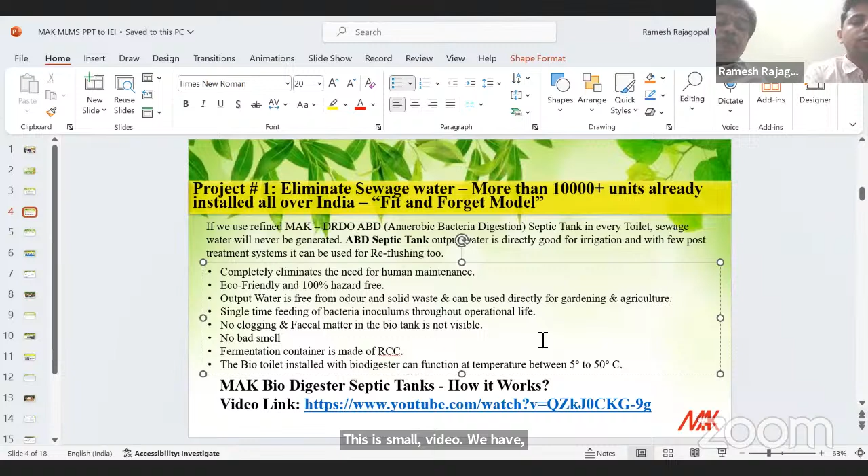There's a small video we are... No, there's not. Okay, we'll come back to the video a little later.

Our concept is that we should not use the underground drainage system for draining sewage, which goes without treatment into water bodies, thereby polluting them.

What we do is arrest the pollution at the source itself using our ABD technology, as well as the technology we obtained from CSIR, the advanced oxidation process. This is a form of tertiary treatment where the effluent from the ABD tank is further treated, and the resulting water is pure, equivalent to drinking water usage.

So we mainly advocate treating the contaminated water at the source, and we say this underground drainage can be avoided, mainly because when water is converted to sewage water and carried through the UGD, it carries a lot of contamination throughout its journey, ending up at one bigger STP. This is like adding up the load before trying to treat it.

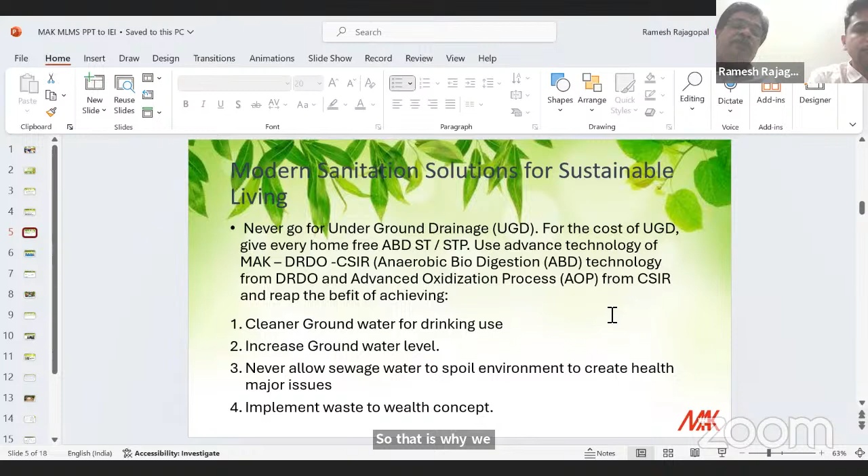Our ABD septic tanks come in 4 standard models: 10 user, 20 user, 40 user, and 100 user, with capacities of 800, 1,600, 2,900, and 8,000 liters. If we want to go beyond the standard models, we can also do on-site civil construction to customize according to the client's needs.

This is the basic flow chart, where the wastewater, the black water meaning fecal matter and matter generated from urinals through flushing, goes through a pre-filter where any solid waste like sanitary napkins or plastic gets filtered out.

Then it flows into our ABD MAK STP septic tank, split into 3 compartments. The majority of fecal matter is digested by anaerobic bacteria in the first compartment, then flows into a second compartment where further digestion happens, producing a small amount of methane gas evacuated through a vent outside, and then the pure treated water comes into the third compartment.

The overall retention time of this ABD tank is around 2.5 days. The final water can be used for irrigation or ground recharge, pumped through a bore into the groundwater to improve groundwater levels, or it can be directly discharged into any water bodies.

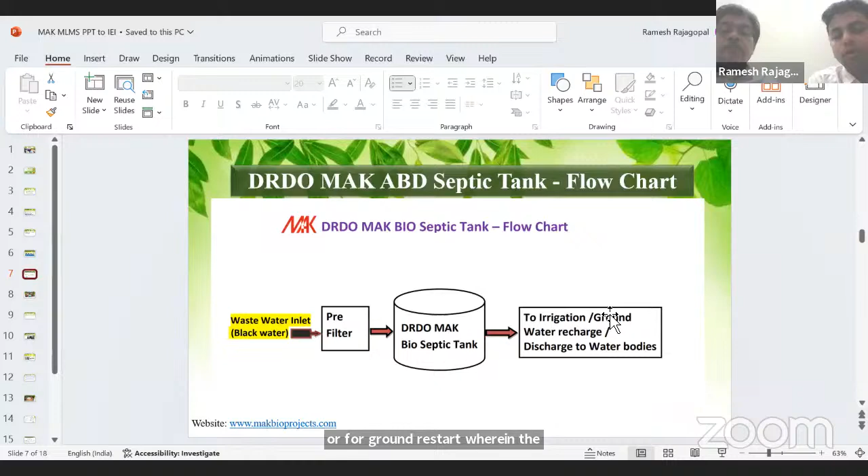This is a comparison which Ramesh sir already explained between our ABD septic tanks and conventional septic tanks. As he said, this is a maintenance-free tank, and the bacteria inoculum has to be fed only one time — it's a fit and forget model.

The other one needs periodic evacuation of sewage weekly or twice a week, and there is no foul smell generated with ours, whereas in the conventional tank a lot of smell is generated. The main thing is pathogen reduction.

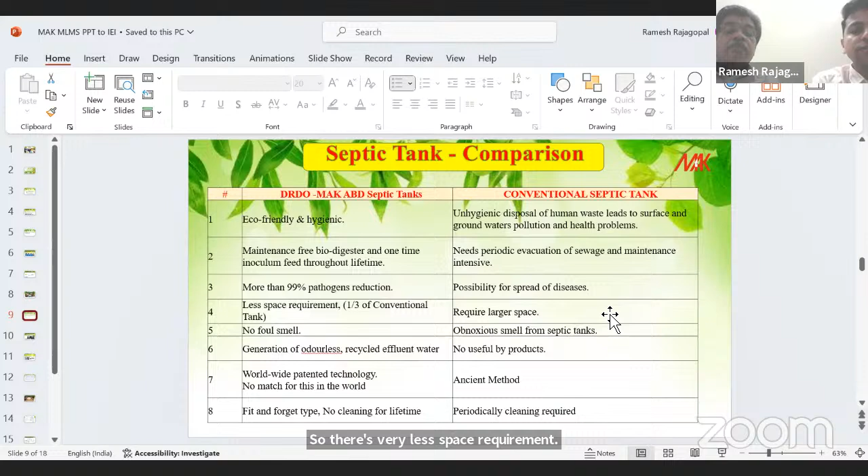It kills almost 99% of pathogens, while the other one, since it is not treated, can spread a lot of diseases from E. coli or viruses. Our septic tank is very compact and modular, requiring very little space. This is a patented technology, whereas the other one is just a normal technology.

This is a project where we try to treat a lake using our MAK inoculum, which is home-generated anaerobic bacteria. As you can see, in the before and after model, the lake has been completely cleared of all pollutants and pollution.

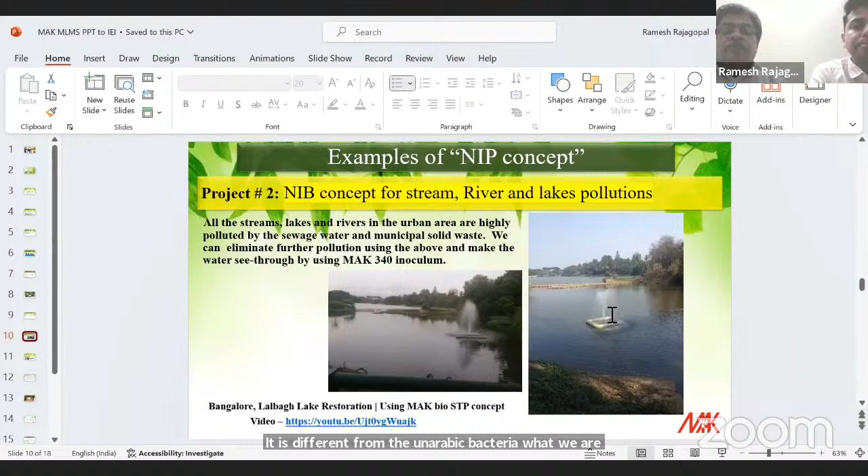This is another different consortium of bacteria. This inoculum is made for aerobic treatment, where for larger river restorations and lake restorations we use this MAK 340 inoculum. It is different from the anaerobic bacteria we got from DRDO. This MAK 340 is found and manufactured by us, on our own.

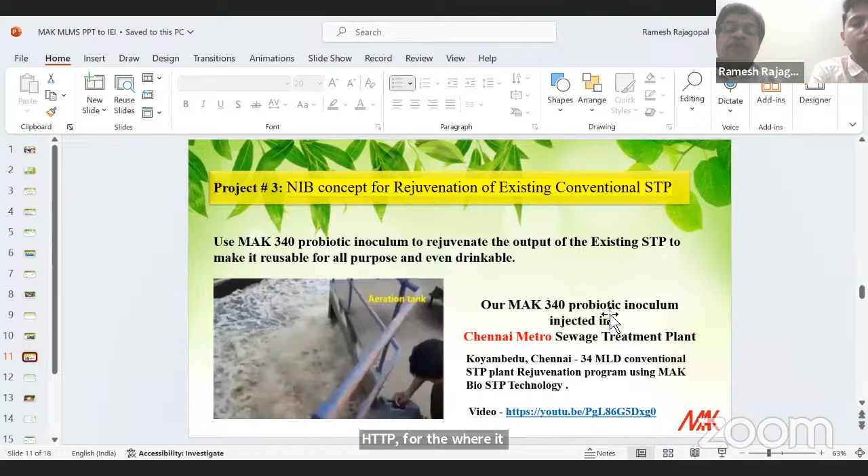The same MAK 340 inoculum is being used in the tertiary treatment of Koyambedu STP, which was a 34 MLD conventional aerobic treatment plant. You can see the result: from BOD level of 202 and COD level of 504 at day 10-11, it has come down to 2.2 and 4 within a span of 11 days.

Initially we were feeding 10% of the volume, and slowly we reduced the volume, until at last the volume is very less. But we need to keep adding the aerobic inoculum on a daily basis. That is more expensive, but still it is effective.

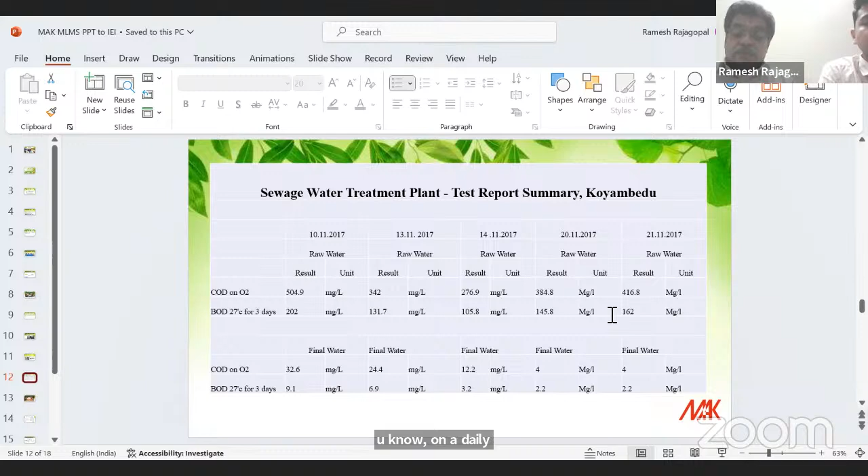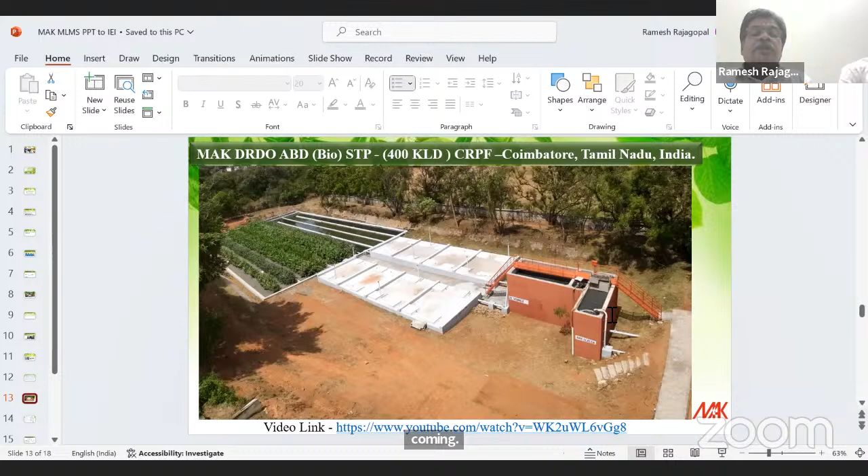Then the output is fed into the reed bed system. After the reed bed system, there's a collection tank where the final treated water comes. From there, the water is reused for gardening the entire campus area.

The TSS is very low, so they could even use drip irrigation. This is the flow chart of the STP, where we have given an instance where both black and grey water are treated separately, or even if combined, we can still treat it.

This is an example where the black water is sent through a pre-filter, then an anaerobic bacteria digestion tank, and then to the reed bed system. After the ABD tank itself, the water is good enough for irrigation.

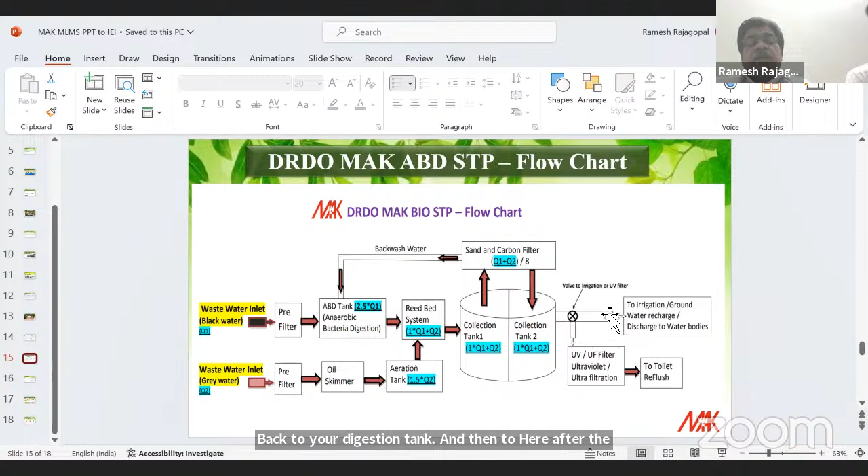But for reusing, reflushing, and other secondary usages, we need some enhancement of the water. So we go for a sand and carbon filter, or UV filter for disinfection, or UF filter for disinfection. Then it can be used for reflushing or secondary usage like construction.

The grey water is again passed through a pre-filter and an oil skimmer, then it goes to an aeration tank, then to the reed bed, and then to the same sand and carbon filter. Depending upon the reuse, it can pass through other tertiary treatments for any enhancement needed.

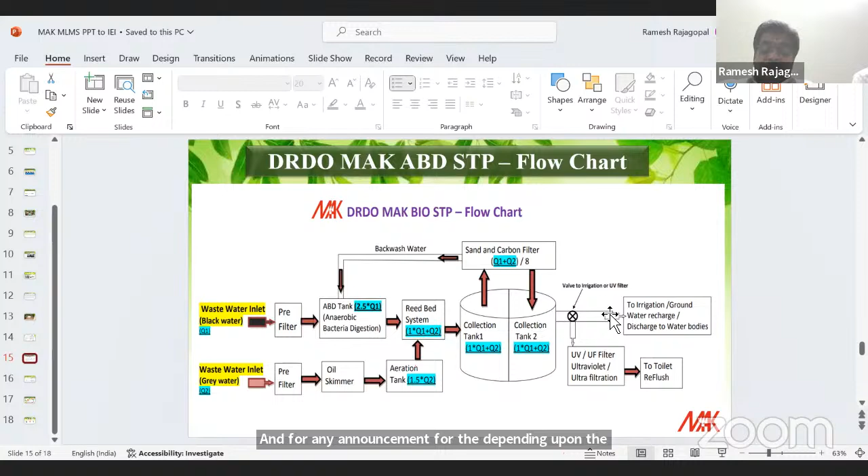The main difference between the anaerobic STP and the conventional STP is that this is eco-friendly and hygienic. It's a maintenance-free biodigester with very low power use, nominally priced, with nil maintenance, low operating expenses, no foul smell, no sludge handling, and no chemicals used. It's a biological treatment that happens on its own, with guaranteed minimum process performance.

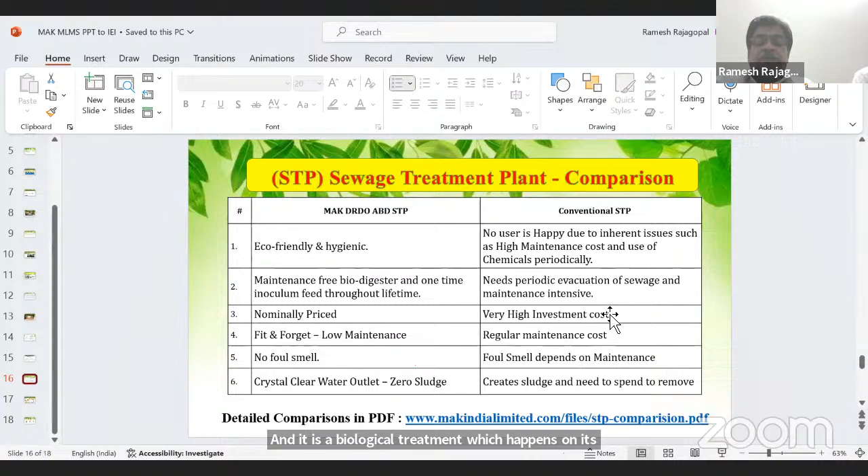These are some of our clients to whom we have supplied our ABD septic tanks and ABD STPs.